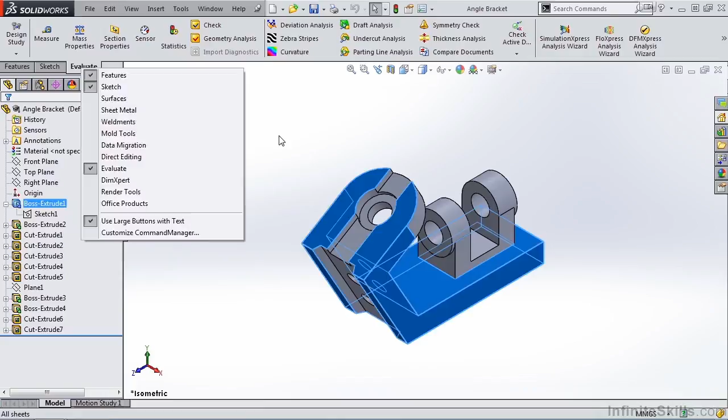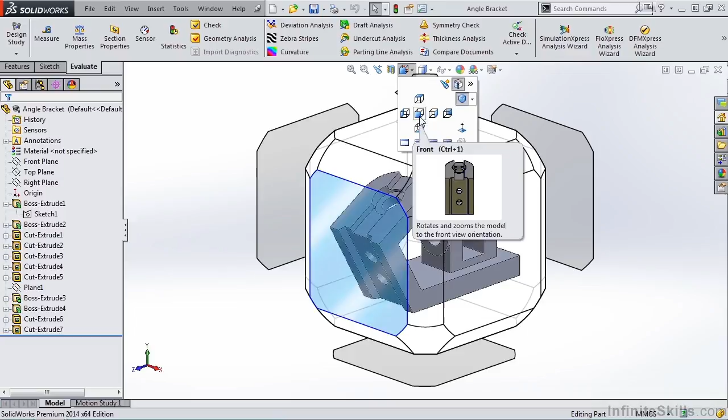In the top middle of the graphics area, we see a heads up view toolbar. This is a handy way to get to some of the most common commands that you use when creating sketches, parts, assemblies, and drawings. For example, zoom to fit, zoom to area. Here's a very useful one: previous view.

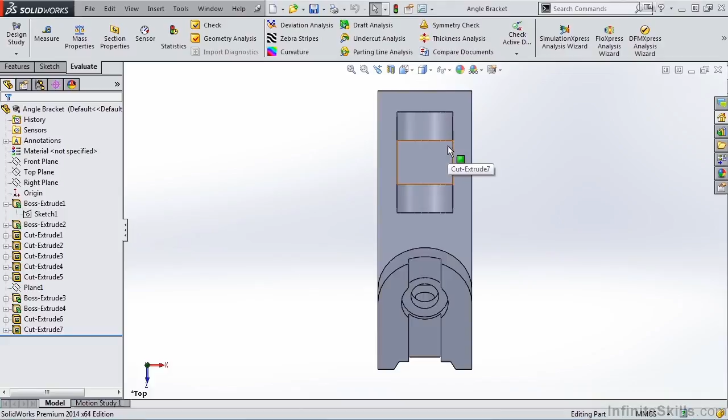We then have our different orthographic views: front, top, bottom, left, right, and rear. And if you have this button here activated, the view selector, by simply tapping the space bar, you can select a face to give you a certain view, for example the front view, or the right-hand side view, or the top view, or an isometric view, and that isometric view can be from any one of the corners, or even a bottom view. Let's go back to an isometric view and select the spacebar one more time.

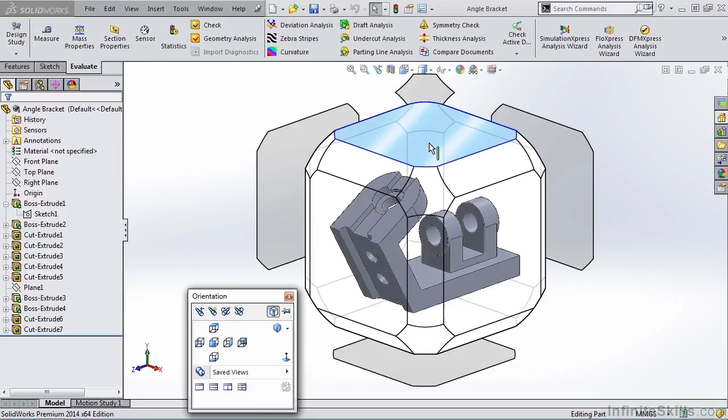Now notice we can also select the edges. But if you look closely, there's a couple edges and corners we cannot get to. For example, this back edge here and this back corner. So how do we get to those? We simply hold down the Alt key and it lights up or highlights that back edge.

So this view cube is very handy. I think you're going to find this very easy to use and a quick way to move your view around on the screen to give you different perspectives of the view. Along with that, we have a drop-down menu, which allows us to view or not view items on the screen, along with some appearance settings.

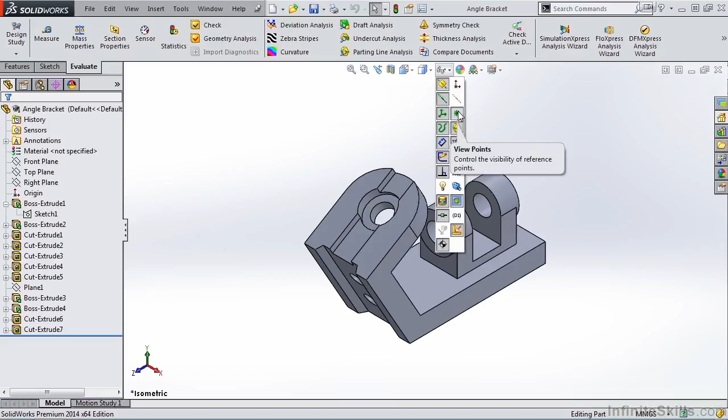Now, to the far right, we have this item called the task pane, and in the task pane we can do many different things. If we expand it, we have access to many SolidWorks tutorials. Very handy. Along with these Infinite Skills video lessons, you will find many tutorials inside of the SolidWorks software. We also have a selection for the design library. We can go out to different vendor sites and pull components into our parts and assemblies.

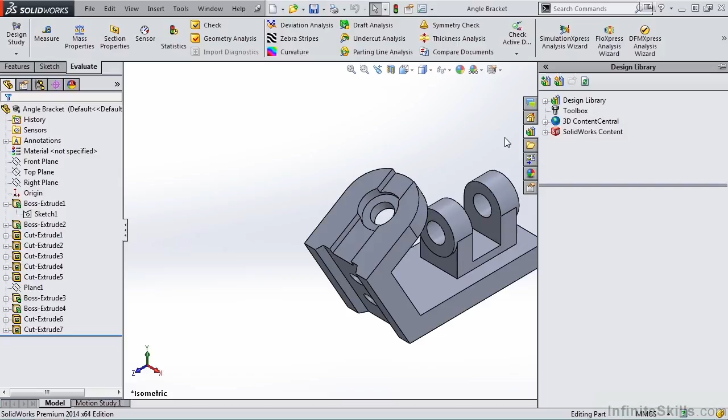We can also create drawing views, change appearance, and set custom properties. A lot of information here, more than we can cover in this lesson, but it gives you an idea that you do have many resources here.

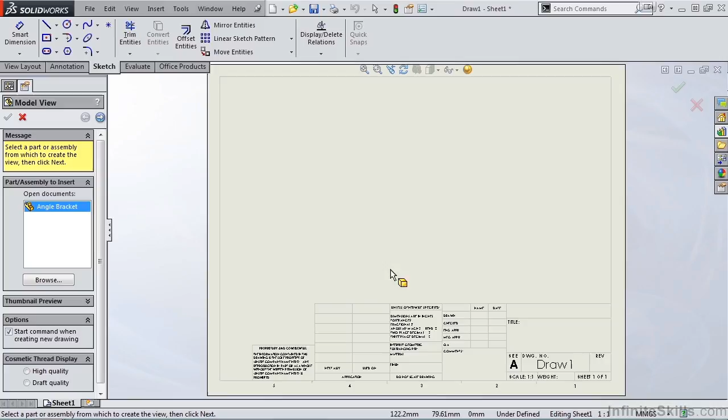Now, if we go into the assembly environment, you will see that the user interface looks very similar. What is different is the command manager. You will have different tabs, different ribbons, because we are in a different environment. And the same is true with the drawing environment. Again, the screen looks the same. However, we do have a drawing sheet here, but we still have the Feature Manager design tree along with the command manager and some different ribbons.

So that gives you a good idea of the SolidWorks 2014 user interface. Now let's move on to the next lesson.